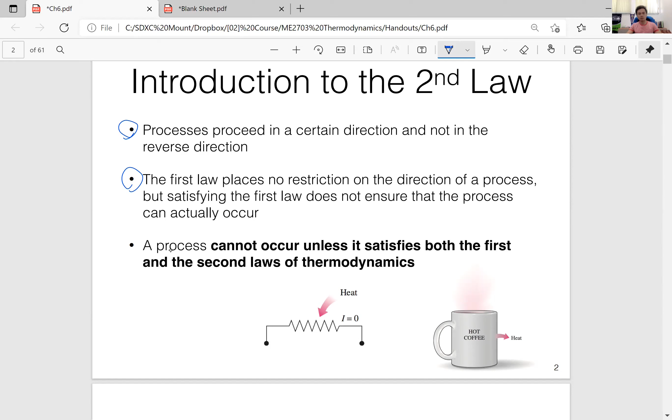Let's say this: processes proceed in a certain direction and not in the reverse direction. So the first law places no restriction on the direction of a process, but satisfying the first law does not guarantee that the process can actually occur.

You can see this in a very well-known, easy example: a hot coffee sitting on a desk. We know this coffee is getting colder and colder over time, because the thermal energy or heat is being lost from the hot coffee to the environment.

So this process happens in nature. However, we know this heat-losing process satisfies the conservation of energy.

If you have heat coming from the environment to the hot coffee, then this hot coffee will be getting hotter and hotter. But this doesn't happen. Why? Well, this heat addition process still satisfies the conservation of energy. We have Q in coming in, then the internal energy of the coffee increases, satisfying the first law.

But it doesn't happen, and it will never happen, because this heat addition process violates the second law of thermodynamics. So the second law of thermodynamics is like defining the direction of the process.

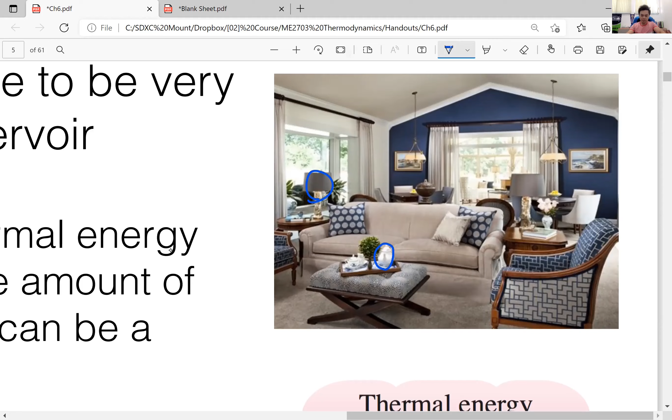Like this: a living room, the air, the atmosphere in this living room is the reservoir with respect to a teapot, a lamp, maybe something else. So the body does not actually have to be super big to be considered a reservoir, as long as it's relatively big, that's enough.

So any physical body whose thermal energy capacity is large relative to the amount of energy it supplies or absorbs can be a thermal reservoir. So a thermal reservoir doesn't need to be super big stuff like an ocean, river, or mountain - I believe a mountain could be a reservoir with respect to, I don't know, a camping fire, things like this. As long as it's relatively large, that's enough.

Then we have two types of reservoir: source and sink. Source is used to supply energy in the form of heat. Sink is used to absorb energy in the form of heat. Usually we call a source a high temperature reservoir, and a sink a low temperature reservoir. So source is to provide energy, sink is to absorb energy - one is high temperature, the other is low temperature.

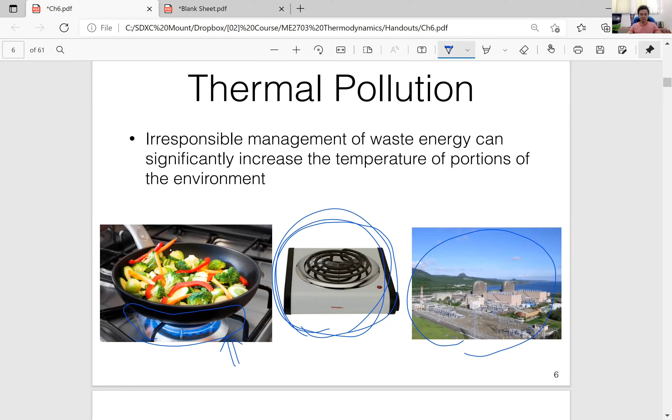This picture is a nuclear power plant in Taiwan, in Pingtung, in Kenting I believe. We know that the temperature around the outlet of this kind of nuclear power plant is a little bit higher. So a couple of years ago, there was an issue where the fish around the outlet of a nuclear power plant looked so weird - the baby fish didn't look like a normal fish, things like this. You can Google this news, I think it was maybe 10 or 20 years ago, not so long ago.

All right, heat engines. So we know that in thermodynamics, in mechanical engineering, the purpose of learning thermodynamics is we want to build a heat engine that has super good efficiency, that can do a lot of work. Heat engine, I would say, is the most important application of thermodynamics in our field, in mechanical engineering.

Okay, look at this. Heat engines are used to convert heat to work, so it's a work producing device. It's similar to a turbine, which is also used to produce work. However, a turbine is a single steady flow device, but a heat engine is not.

A heat engine consists of several steady flow devices, and a turbine is one of them. I think it's a minimum of 4 steady flow devices. The combination of these devices is used to produce so-called net work output, and we will see this later.

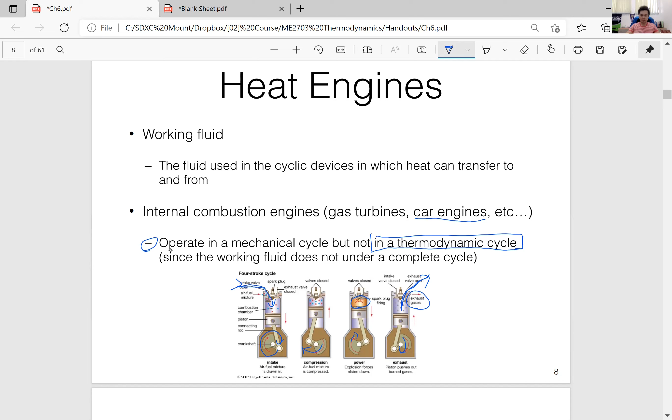External combustion engine is like a power plant. Usually, most power plants are external combustion engines. So the difference between internal combustion engine and external combustion engine is the place where the combustion happens. Internal combustion engine means combustion happens inside the engine. External combustion engines, literally, combustion happens outside of the engine, external to the engine.

So we will be focusing on external combustion engines in this chapter.

A very typical heat engine consists of at least 4 steady flow devices: pump, boiler, turbine, and condenser. Please keep this schematic in mind. You need to memorize the schematic of this very typical heat engine. Pump, boiler, turbine, condenser.

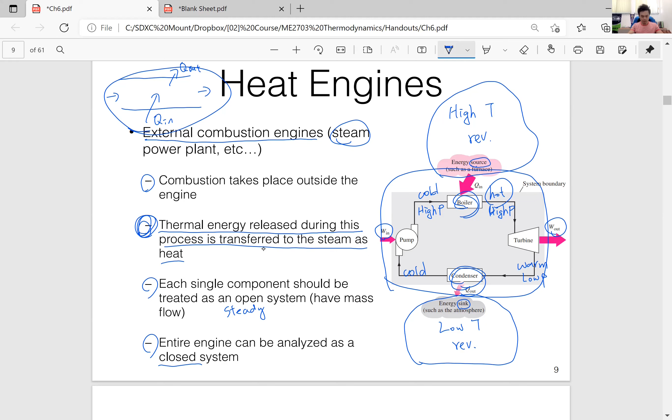So every single device in this heat engine is a steady flow device, and choosing the entire engine as one single system, then this heat engine is a closed system. Of course, you need to know the definition of closed system and open system so you can conclude like this.

So for a closed system undergoing a cycle, the change in internal energy is zero, right? Because from the energy balance equation, we know E in minus E out equals delta E system, which is U2 minus U1. If the process is a cycle, that means the final state is the same as the initial state.

So that means U2 equals U1. When U2 equals U1, we know this is zero. This is what the statement says here: for a closed system undergoing a cycle, the change in internal energy is zero.

So E in minus E out is zero. If we break down E in and E out, for a closed system, energy can be transferred by heat and work.

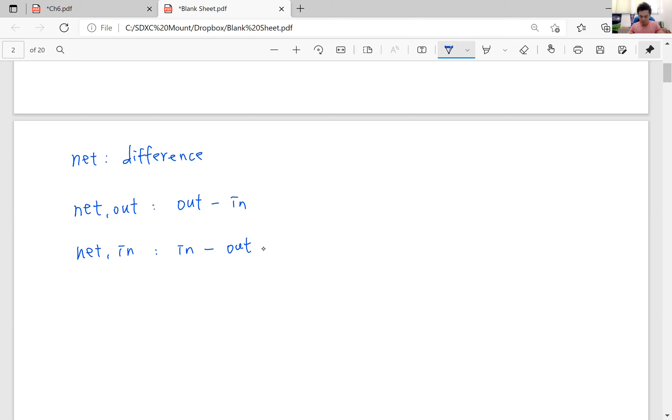Net means there's a difference. Net out means something out minus the same thing in. Net in is something in minus the same thing out.

So work net out is work out minus work in. Q net in is Q in minus Q out. The idea is the same, as long as you know: net out is out minus in, net in is in minus out.

Usually we don't say 'Q net in'—saying it isn't wrong, but we just don't do that. However, we do use 'net out' a lot, because this is what we care about most: how much work this heat engine can produce. So we have this name.

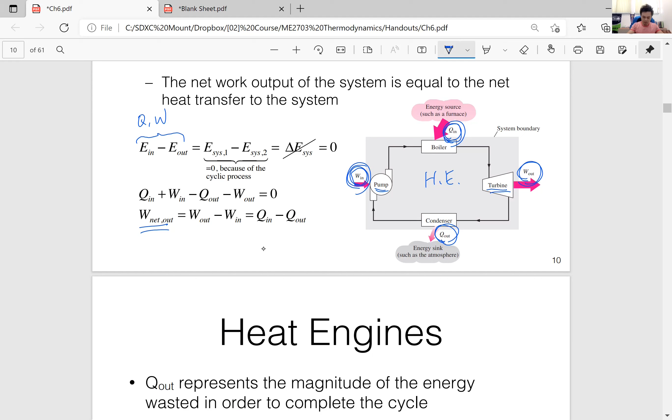Going back here, we want to maximize the net work output of this heat engine, since it's used to produce power—of course we want as much power as possible. One way to do it is to increase Q in: net work out is proportional to Q in. As long as we have a very large Q in, then we have a very large work out.

Another way is this: Q out is part of the process—the condenser dumps the waste energy to the environment, the energy sink. So can we minimize Q out, or make it zero? If we didn't have this condenser, we wouldn't need to dump waste energy, and net work output would be maximum, equal to Q in. That would be wonderful.

So Q out represents the magnitude of energy wasted in order to complete the cycle. However, unfortunately, Q out is never zero. We'll tell you why later.

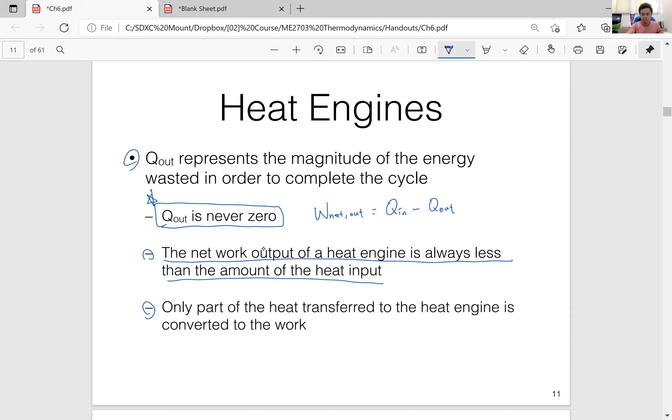Okay, so now we know Q out cannot be zero, but we can try to minimize Q out to save energy or to increase the thermal efficiency.

So the fraction of the heat input converted to net work output is a measure of a heat engine, which is the thermal efficiency. In chapter 1, we defined efficiency as desired output over required input. Keep this in mind because we will be using this for different types of devices.

Even though it's the same device, if the purpose is different, the purpose of a device is the desired output. For example, the refrigerator and heat pump are actually the same device. But because the purpose of a heat pump is to heat up a space, and the purpose of a refrigerator is to cool a space, these two devices sound like two different devices, but actually they are the same device with different purposes.

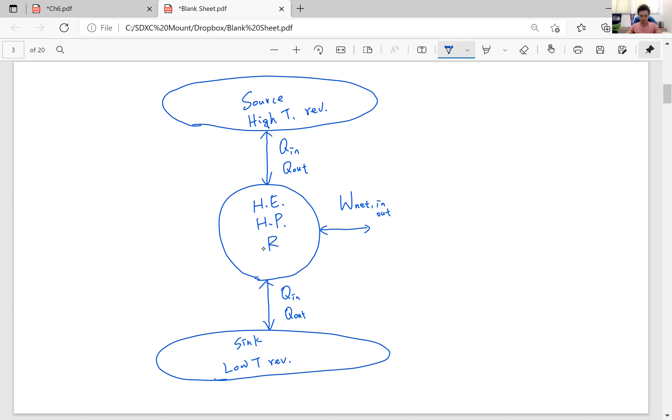All right, like for example, this is apparently a heat engine, because there's a work output. So this has to be a heat engine. The net work output of engine one is 20 kJ, the waste heat is 80 kJ, and the heat input is 100.

So by definition, the thermal efficiency is desired output over required input. The net work output is the desired output of a heat engine, so the desired output of this heat engine is 20. The required input, this 100 kJ, is the required input of this heat engine. So the thermal efficiency is 20%.

Well, if the net work output is 30 and the heat input is still the same, 100 kJ, then for heat engine two, thermal efficiency is 30%. So in this case, what I want to tell you is the waste heat here is not so important for the calculation - the desired output over required input, there's no waste heat term directly in this case.

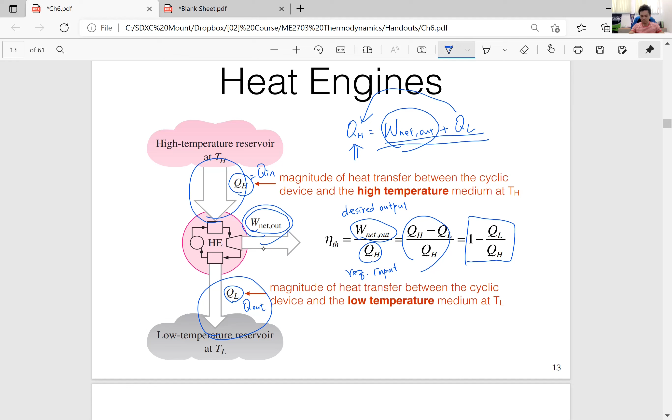So now the question is, can we save Q out? Yes, we can save Q out, but we cannot make Q out zero. Every heat engine must waste some energy by transferring it to a low temperature reservoir in order to complete a cycle. Another important concept is that we have to transfer it to a low temperature reservoir.

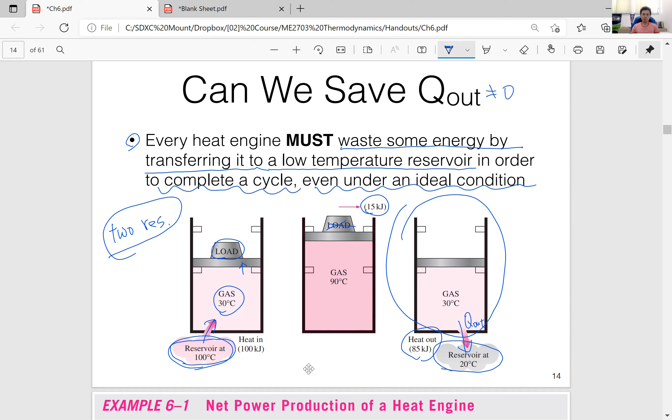One is high temperature reservoir, the other is low temperature reservoir. It has to have two heat transfer processes associated with two reservoirs. One is high temperature reservoir, which is the energy source. The other is low temperature reservoir, which is the energy sink. So two conclusions from this example: Q out is never zero, it's always positive, there must be some Q out. The other is this cyclic device has to have heat transfer processes with two reservoirs, a high temperature reservoir and a low temperature reservoir. That is the idea.

This example: heat is transferred to a heat engine from a furnace at a rate of 80 megawatts. If the rate of waste heat rejection to a nearby river is 50 megawatts, determine the net work output and thermal efficiency for this heat engine. From the first law, which is the conservation of energy, we know QH dot should be the summation of the net work output and heat rejection. This is Q in, one Q in, and we have two outs, one in, two outs, and they have to be the same.

So we can get net work out easily, which is 80 minus 50, so we have 30 megawatts net work output. Then thermal efficiency is desired output over required input. Desired output is just the net work out. Required input, we have only one input. That is the thermal efficiency. Simple, straightforward.

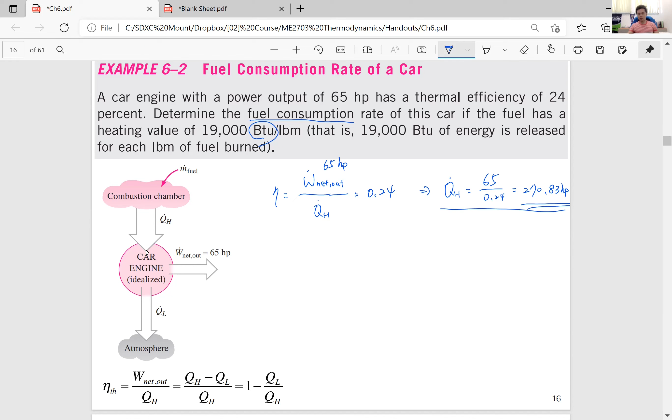So this QH is the fuel consumption. I think all you need to do is convert horsepower into BTU, then divide by this 19,000 BTU per LBM. So you can know how much LBM the fuel has to be consumed.

Next one is Kelvin-Planck's statement. The entire second law of thermodynamics can be constituted by two statements. One is Kelvin-Planck statement, the other is Clausius statement. So these two statements are the foundation of the second law of thermodynamics, so very, very important, and you need to really understand what these two statements are.

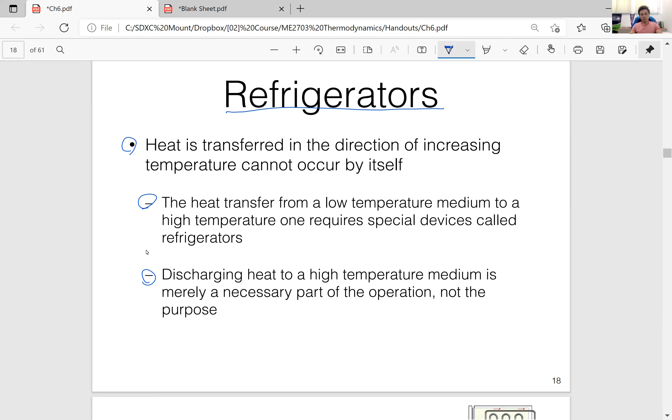We know, for example, a heat engine - we have talked about heat engines before. This is TL, we have Q in, we have Q out. This is a heat engine. Now we are looking at the refrigerator. A refrigerator consumes work, so there's a work input, which is electrical work in.

We are transferring the energy from a low temperature medium to a high temperature one. So we want to transfer this energy from low temperature medium to high temperature one. This is QH, this is QL. This is the schematic of a refrigerator. Let me share this.

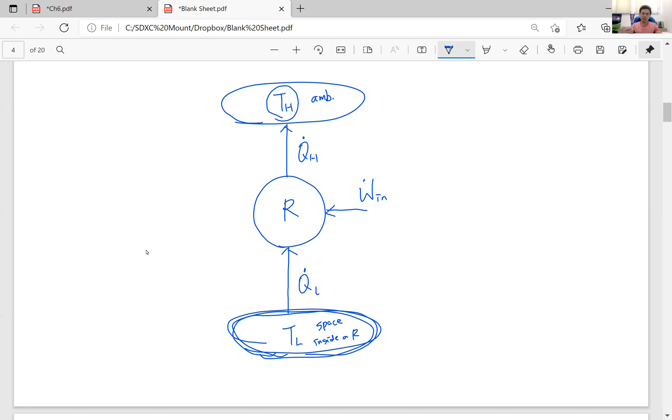This is because a refrigerator actually dumps some energy, or transfers some energy, from inside out. This is inside, this is outside the refrigerator. So this is how a refrigerator looks like, the schematic, and we know it requires work input.

But here, actually, this is what I want to talk about. Discharging heat to a high temperature medium is merely a necessary part of the operation, not the purpose. So this is not the purpose - this is the purpose. For a refrigerator, we want to cool the space inside the refrigerator. This is the purpose. But QH dot here is not the purpose.

But from Kelvin Planck's statement, we know this cyclic device has to interact with two reservoirs, and the heat rejection cannot be saved to zero - it must reject some heat. In this case, QH dot is the heat rejection. Because now we are talking about a refrigerator, what is being rejected? QH dot - this is the heat rejection. So it has to interact with two reservoirs, and it has to have some heat rejection. These two conditions are satisfied.

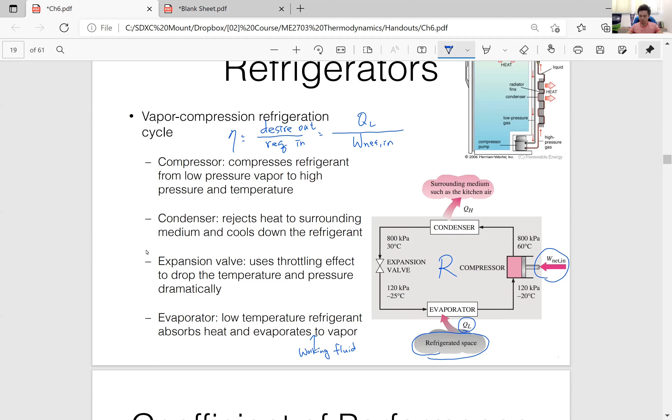But from the energy balance, we know that the summation of these two ins, QL and net work in, should be the same as QH. So QL plus net work in equals QH, which means net work in is QH minus QL.

So now the question is, we can divide QL on both sides. This gives QH over QL minus 1. And we know QH is larger than QL.

So QH over QL is greater than 1, meaning there's a chance this value is larger than 1. If QH over QL is 1.1, then this becomes 0.1, times 100, that's 10, or 1000%. It's larger than 1.

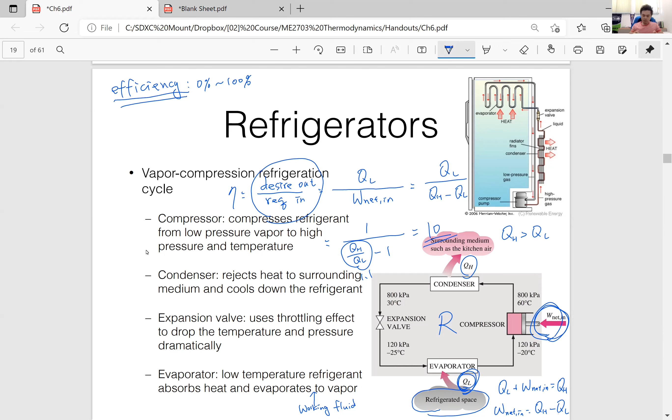Using this traditional definition — when we say efficiency, efficiency is defined between 0 to 100%. This is how we usually use the word efficiency, from 0 to 1, or 0% to 100%. But if we follow this, we end up with more than 100% efficiency. So in this case, we don't call this efficiency.

We call this coefficient of performance, aka COP. You will hear this if you want to buy a refrigerator — the value you need to evaluate the efficiency is not thermal efficiency anymore, it's usually denoted by COP, coefficient of performance.

So this is what I just wrote — we don't call this efficiency anymore. We don't use this term because efficiency implies the maximum is 1 or 100%. So instead, we use COP. The value of COP can be greater than 1, it depends.

And R here represents refrigerator, because later we will talk about the heat pump, so COP HP, where HP means heat pump. These two devices are the same — heat pump and refrigerator are the same device, but the purpose is different. We will talk about heat pump later.

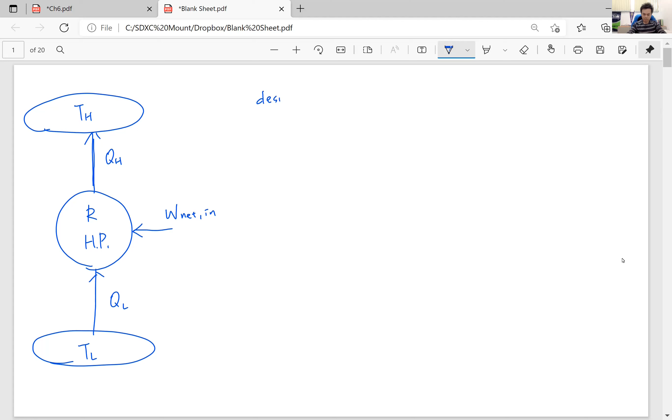The performance or efficiency we use, the definition is the same: it's desired output over required input. For refrigerator, the desired output is what? Because a refrigerator, we want to cool a space as much as possible, so apparently we want to maximize QL so that TL, this space, can be very, very cool.

So for refrigerator, the desired output is QL. But for heat pump, the desired output is supposed to be QH, because for heat pump we want to maximize the temperature in this space. So we want to maximize QH. Their desired output is different, although they are exactly the same stuff, because the purpose is different.

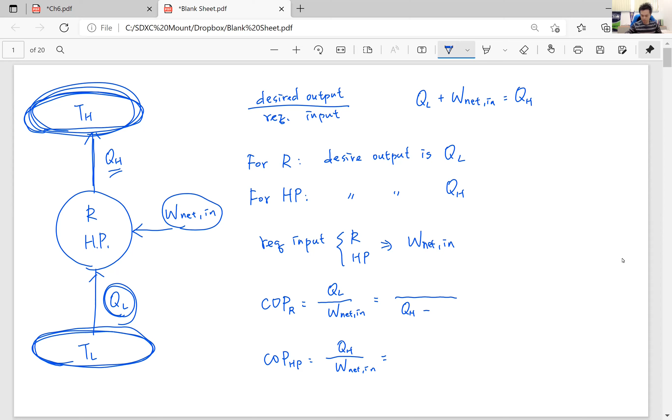From energy conservation, we know QL plus network input should be the same as QH. From the energy balance, QL plus network input should equal QH. So we can rewrite COP as QH minus QL. Network input is QH minus QL. Then up here for refrigerator, this is QL. And for heat pump, up here this is QH, over QH minus QL.

So we can further divide by QL on both sides. This becomes 1, this is QH over QL minus 1. And dividing by QH, this is 1, this is 1 minus QL over QH.

So you can see heat pump is actually COPR plus 1. COPR is QL over QH minus QL. If this plus 1, that becomes QH minus QL over QH minus QL, which is QL plus QH minus QL over QH minus QL, that becomes QH over QH minus QL, which is COPHP.

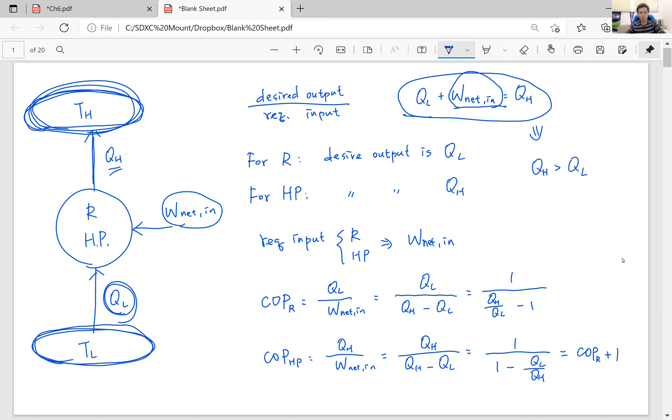Another thing to notice is from the energy balance equation, we know QH is larger than QL. It's always larger than QL because the network input is always a positive value. So QH is always greater than QL. Look at this - so this ratio is always greater than 1.

Because QH is always larger than QL, COP-HP is always greater than 1, of course. Yeah, because COPR is greater than 1, so COP-HP has to be even larger than 1 by 1. Okay, all right, so go back to the slides.

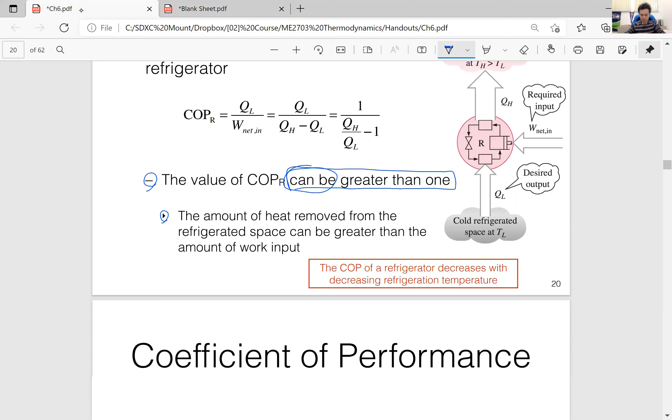And for heat pump, COP-HP is always greater than 1. It's always greater than 1 because COPR is a positive quantity. Well, COPR is not necessarily always greater than 1, it can be greater than 1.

If QH is 10 times QL, then COPR is less than 1, right? But if QH is very close to QL, COPR can be greater than 1. So it can be greater than 1, can be smaller than 1, it doesn't matter. But COP-HP is always greater than 1 because COPR is a positive value, can be 0 point something or can be something greater than 1. So no matter what, plus 1, that means COP-HP is always greater than 1.

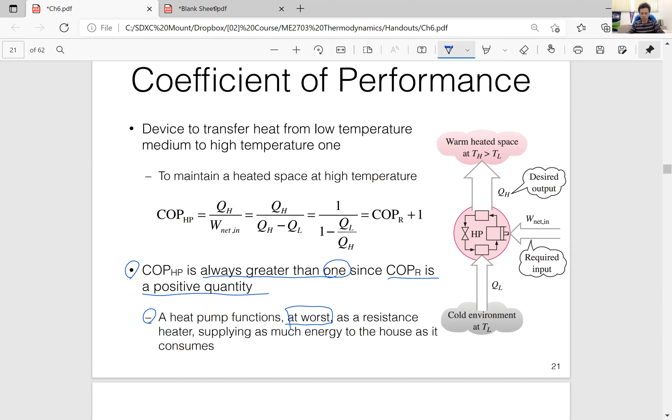So that brings an interesting point: a heat pump functions at worst as a resistance heater, supplying as much energy to the house as it consumes. So you can see that a heat pump consumes power, but a heat pump uses this work input to draw some energy, then combine these two energies together to supply to the heating space, which is this space.

COP heat pump is greater than 1. That means in terms of energy usage efficiency, if you want to heat up a space using a heat pump, it's better compared with the resistance heater, because we know for a resistance heater, the energy transformation rate is 100%. All the electrical power can be transformed into thermal energy, 100%, for a resistance heater.

But heat pump can do much more. Heat pump can use this energy to draw more energy and together supply to this heating space. So in terms of energy efficiency, in terms of the performance, using a heat pump to heat up a space is better. But would you do this? That's a question, because usually the cost of a heat pump is much higher than the cost of a resistance heater.

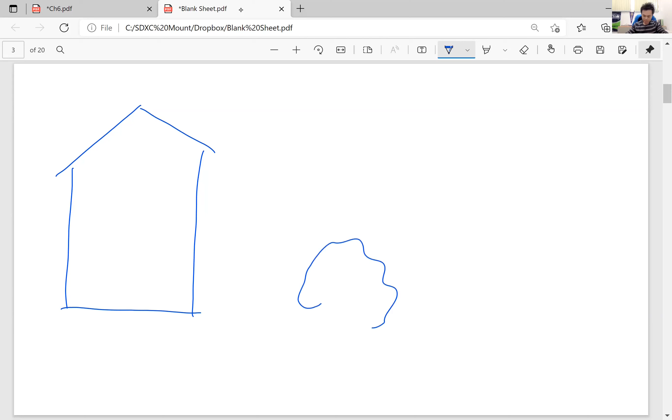And I can't remember, that's a very good example or homework. It's like a design problem, and I like that, but I couldn't find it in the textbook anymore, I'm not sure why. If there's a house, and there's a hot rock, let's say this, there's a hot rock, like 100 degrees or 500 degrees hot.

So now the question is, how do you want to use this hot rock to heat up this house with maximum temperature increase? If cost doesn't matter, you don't need to concern about cost issues. Well, of course, you can just bring the rock to the house, right?

Then this rock will release some thermal energy, right? So eventually the temperature of the rock and the temperature of the room will reach thermal equilibrium, right? That works. But is this the best usage of this hot rock? Apparently no, right? Because now you have learned the heat pump.

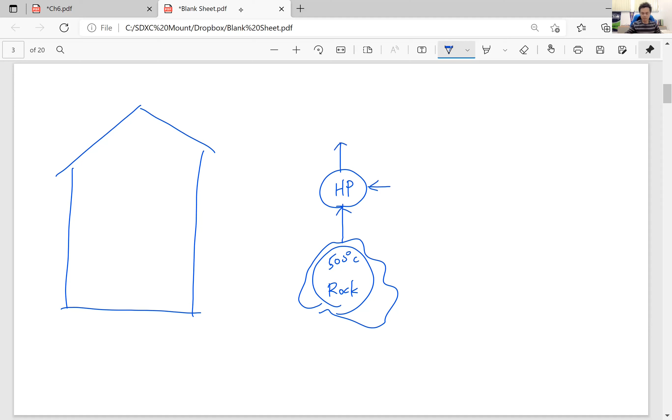Hot rock means this is an energy source. So if you could use this energy by heat pump, the heat pump can bring additional energy, which is the electrical power consumption. So this heat pump can draw all the energy inside this hot rock together with the energy consumed, to supply to this house. Using this way, we can better use the energy stored in this hot rock, by a heat pump.

So this is more energy efficient, but one more time, this is the case when cost is not an issue. But cost is always an issue in reality, right? A heat pump costs like a few thousand New Taiwan dollars. So that's a sociology problem, I'm gonna say this, okay? There's a problem with this, okay?

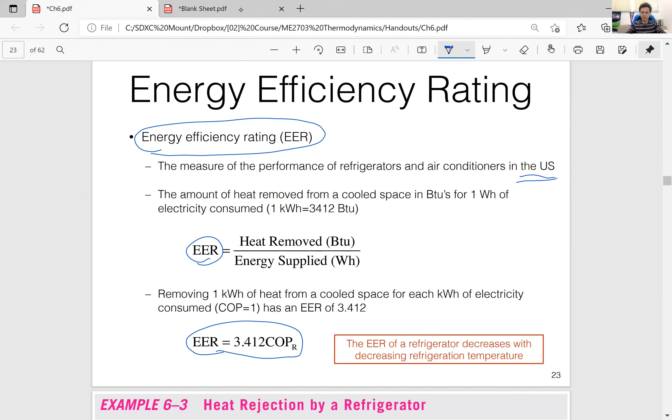Okay, another index to evaluate the performance of a heat pump or refrigerator is EER, energy efficiency rating. We don't use this a lot because it's just a unit conversion, and it's very common in the US. So EER and COP, their relationship is just a linear equation, a linear relationship. Not so important, but I just wanted to let you know there's another measure to evaluate energy efficiency, EER.

Look at this example. The examples in chapter 6 are super easy, but you need to know the concept. The concept in chapter 6 is super important. Okay, look at this. The food compartment of a refrigerator is maintained at 4 degrees by removing heat from it at a rate of this much. If the required power input of the refrigerator is 2 kilowatts, determine the COP and QH dot.

That's super easy, right? Because this is COP. This is a refrigerator, so COP of refrigerator is desired output over required input. So desired output of a refrigerator should be QL dot, right? Required input is the net work input. That's all, right?

So this is 360 kJ per minute, so over 60 to become kJ per second, which is kilowatts, right? Over net work input is 2, that's it. Then based on energy balance, QH dot should be the summation of QL dot plus the net work input, which is 2 plus 6, right? This is 8. So this is 6 over 2, which is 3. Okay, that's all. Easy.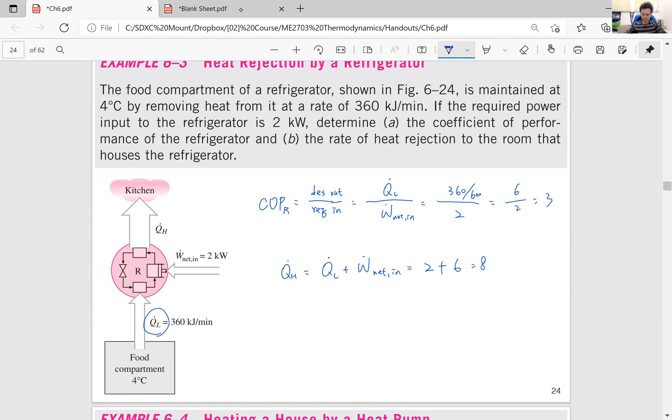Another one is a heat pump. A heat pump is used to meet the heating requirement of a house and maintain it at 20 degrees. On a day, the outdoor temperature drops to -2 degrees, and the house is estimated to lose heat at a rate of 80,000 kilojoules per hour.

If the COP of the heat pump is 2.5, we are looking for the power consumption of the heat pump and QL dot. The house is kept at 20 degrees, so the amount of heat loss should be the same as the amount of heat gain by the house. So you need to realize that this QH dot is actually 80,000 kilojoule per hour, so that the house temperature can be maintained.

The COP of the heat pump is given. COP heat pump equals desired output over required input. Desired output of a heat pump is QH, and required input is the net work input. COP is 2.5, and we know QH dot is 80,000 kilojoule per hour, so we can get the net work input.

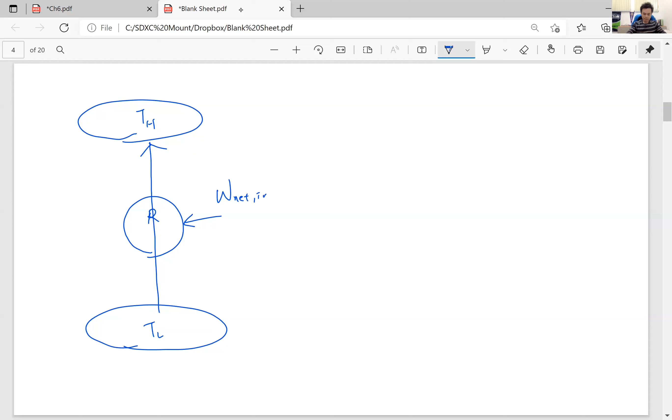One more time: the Clausius statement states that transferring energy from a low temperature medium to a high temperature medium is possible by using a refrigerator that has to consume some power, and that power is work. In other words, a refrigerator needs these three elements: QL, QH, and net work input. You need all three of these. Without any of these three energy transfers, this refrigerator cannot work. That is what the Clausius statement states.

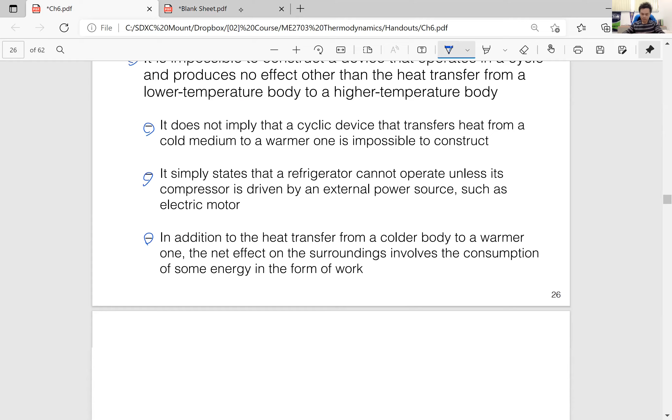The second law, just like the first law, is based on experimental observations. The Kelvin-Planck statement and the Clausius statement are negative statements, meaning they cannot be proved mathematically, because they are experimental observations. Again, the Kelvin-Planck statement and the Clausius statement can be used as expressions of the second law of thermodynamics. These two statements are the fundamentals of the second law.

Recall that in the very beginning of this chapter, we said the first law places no restriction on the direction of a process. Hot coffee gets colder and colder, it will not get hotter and hotter. Even though the energy transfer to this hot coffee satisfies the first law of thermodynamics, which is conservation of energy, this heat addition process to the hot coffee violates the second law because the direction of this heat transfer violates the second law of thermodynamics.

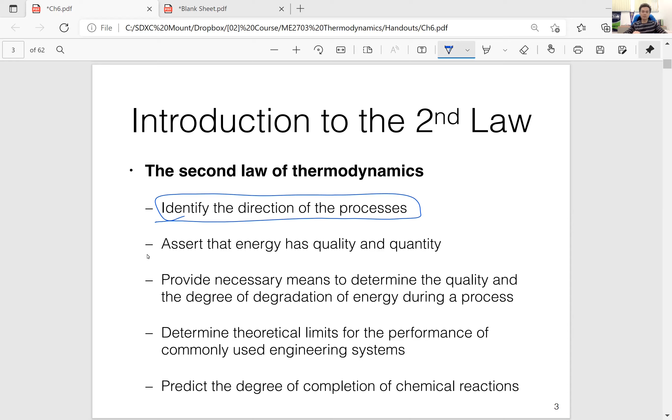Let's go back to the Clausius statement. We finished the second law. Now we are going to prove one thing: any device that violates the Kelvin-Planck statement also violates the Clausius statement, and vice versa.

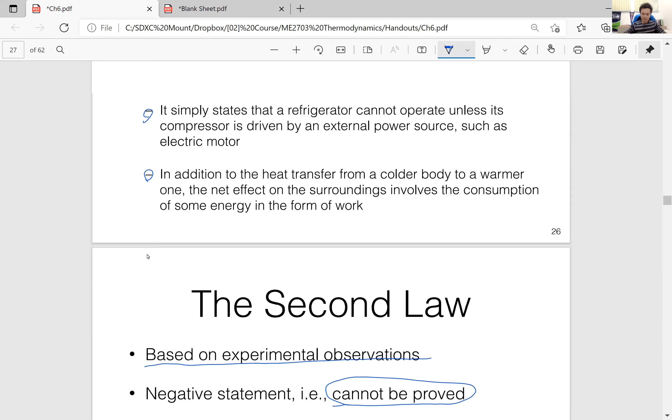So it looks like the Kelvin-Planck statement talks about the number of reservoirs, right? We need two reservoirs, and the thermal efficiency of a heat engine cannot reach 100%. The Clausius statement tells us that transferring energy from a cold medium to a high temperature medium is possible by a refrigerator, but that refrigerator has to consume power. It looks like these two statements are not related to each other, but actually they are.

Now we are trying to prove that violating the Kelvin-Planck statement also violates the Clausius statement, and actually, violating the Clausius statement also violates the Kelvin-Planck statement. Let's try to prove this.

So now we have a heat engine, and we assume this heat engine has a thermal efficiency of 100%. That violates the Kelvin-Planck statement, right? Because the thermal efficiency is 100%, this heat engine can operate with only one thermal reservoir. So this heat engine doesn't require the low temperature reservoir, because the efficiency is 100%. So all the heat supplied by the high temperature medium is 100% converted to the net work output.

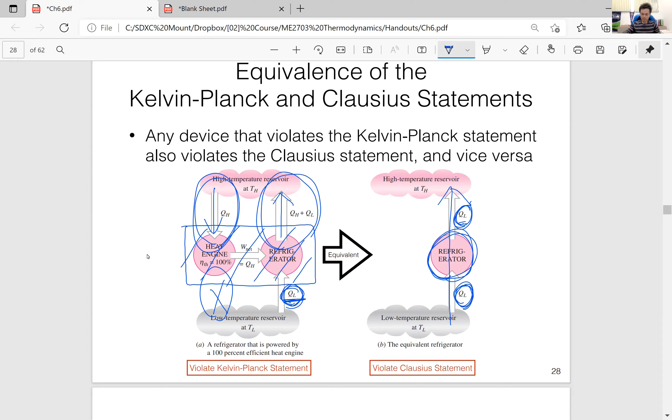Next is perpetual motion machine. So what is this? What is machine? This is a PMM.

A process cannot occur unless it satisfies both the first law and the second law of thermodynamics. We already know this. Any device that violates either law is called a perpetual motion machine. But so far, no perpetual motion machine is known to have worked.

I will emphasize this: so far, at this moment. That doesn't mean you won't be able to find anything that violates either law. You probably could.

If one day in the future you figure out there's a machine that violates either law, I guarantee you could win the Nobel Prize. But when you deliver a lecture for the Nobel Prize, you could just mention a little bit about me. You could say that when I was an undergraduate student, taking Dr. Wen's thermodynamics, he mentioned that no perpetual motion machine had been found by the time he gave us this lecture, but he encouraged us to find one, and I did. So I won the Nobel Prize. Thanks, Dr. Wen, for his lecture like 20 years ago. Maybe by that time I'm already dead, but it's fine. I will feel happy for you, and for myself as well. I wanted to say it's a joke, but this could be true, right? Who knows? I don't know. Okay, but at least so far, no perpetual motion machine has been found.

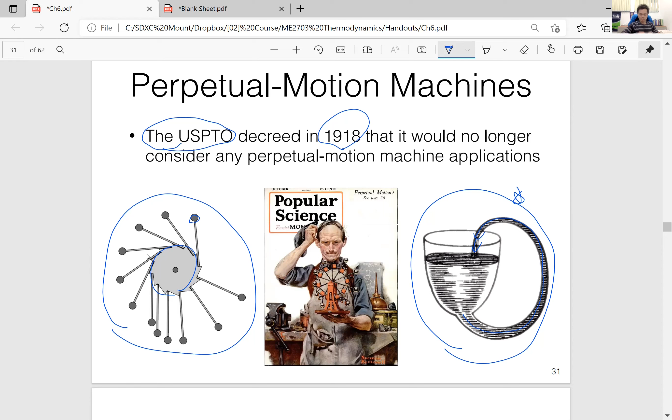Frauds of PMM. Well, this is Chinese, but this is the most interesting one. I copied this from the internet, I think from Wikipedia. This is the yellow one here, this is interesting. This guy published or described something in this journal: I think the cleverest perpetual motion machine ever invented was one displayed in the Paris Expo in the 1860s.

It's super interesting, you can see this. It consisted of a large wheel with balls rolling about in its compartments. The inventor claimed that nobody would ever be able to stop the wheel because it was a perpetual motion machine. Many visitors tried to stop it, but it went on turning as soon as they took their hands off it. So they pushed it to try to stop the rotation.

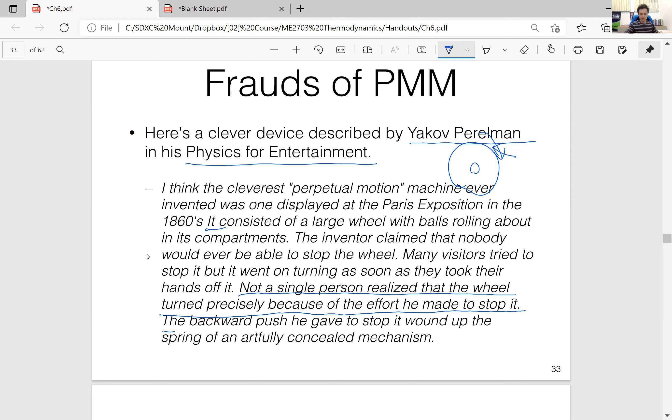If this wheel is rotating clockwise, people wanting to stop it would push counterclockwise. But turns out not a single person realized that the wheel turned on precisely because of the effort he made to stop it. Because of what? The backward push he gave to stop it wound the spring of the artfully concealed mechanism. So pushing back on this wheel actually gives the energy to make this wheel turn.

So this is very interesting. Of course, this is a fraud. I think this guy never learned thermodynamics, but this guy might be an expert in psychology.

Let's continue on our lecture: reversible processes. The following ideas are very important for the rest of chapter 6: reversible process, irreversible process, and Carnot cycle, which is the most important stop in chapter 6, I believe. So let's look at this.

Reversible process, what is this? A reversible process is one that can be reversed without leaving any trace on the surroundings. That sounds very ambiguous, but if you can see an example like this, let me show you.

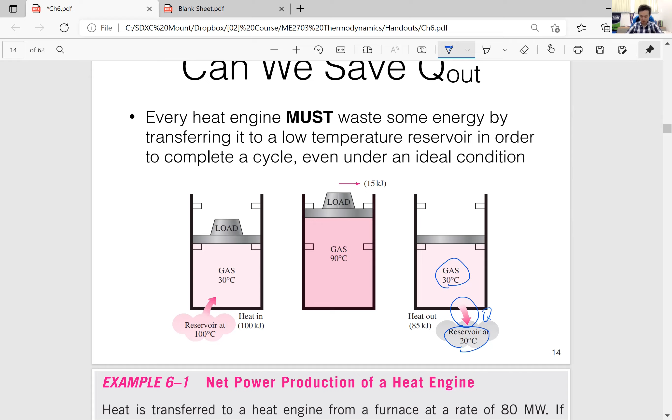That means any trace on the surroundings. In this case, I would say this is the heat out, Q out. So this Q out, because the gas temperature and the reservoir's temperature are different, this heat transfer process could cause some kind of trace. Another, more explicit example is a cooking grill.

So if this is a reversible cooking, let's say Q is 600 kJ to this broccoli and everything else. If this is a reversible process, then when we cool this cooking stuff, the heat release should be 600 kJ, without leaving any trace.

But actually, when we cook this, there's a heat loss, heat waste to the surroundings. So this is a kind of so-called trace.

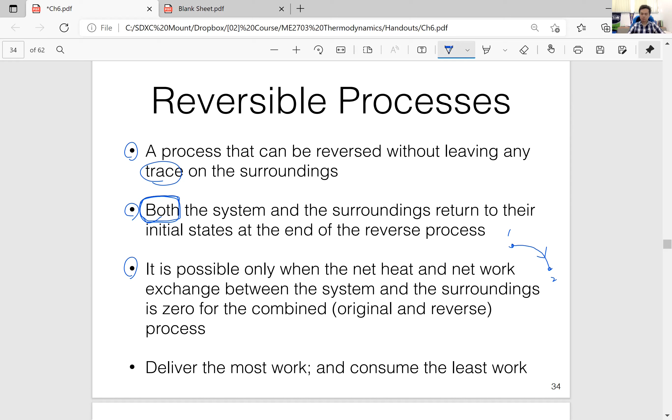Well, not necessarily a real cycle, but the original process and reverse process -- if this is state 1, this is state 2, and the path is this curve from state 1 to state 2. If this process is reversible, that means when you want to go from state 2 back to state 1, you follow exactly the same path, then go back to state 1. So it's not a real cycle, right?

A cycle is like this. This is a cycle. This is 1, this is 2. They are at the same point. So this is different.

And this is probably the most important conclusion. I made this -- how many stars? 10 stars. So that means this is so important.

If the process is reversible, that means if your device is experiencing a reversible process, then if your device is used to deliver work, this device delivers the most work. Similarly, if your device is used to consume work, then if your device is a reversible device, it consumes the least work. This is a very important conclusion when we learn the so-called reversible process.

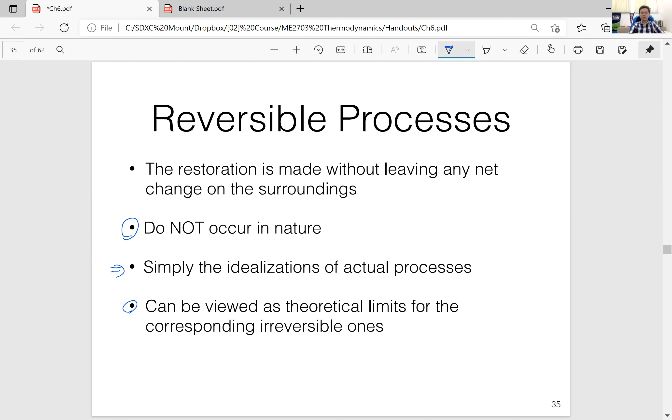So that's the purpose. We want to know the maximum, the critical, theoretical limits -- we want to know if the device we design runs in reversible processes, how much work it can deliver. Then this work is the most work this device can deliver.

Or the work consumed is the least work consumed by this device. That's the purpose. We want to know the capability, the maximum or minimum capability of the device we design, if we use the reversible process, if the device runs in reversible processes.

So if the processes are not reversible, then they are irreversible processes. Processes that are not reversible are irreversible, that cannot reverse themselves spontaneously and restore the system to its initial state. It's not reversible. The surroundings usually do some work on the system and therefore it does not return to its original state.

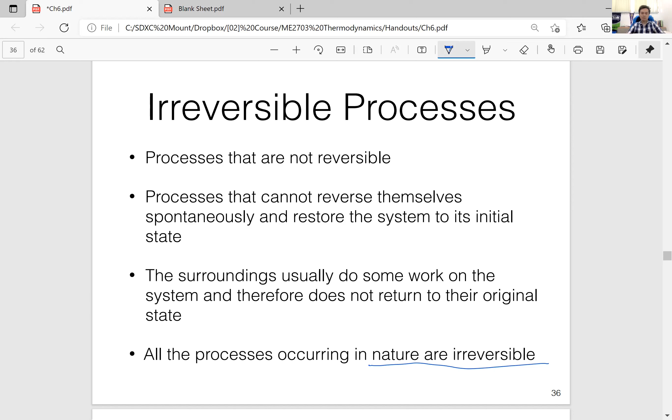This is reality. So all the processes occurring in nature are irreversible. Again, reversible processes do not exist. So what causes a process to be irreversible?

There are a lot of irreversibilities that occur in nature. For example, heat transfer process across a finite temperature difference. I think this is a very important one. Temperature difference is a driving force for heat transfer, so all heat transfer happening in reality is irreversible. That makes sense, because we know all processes in nature are irreversible, and all heat transfer happens across a finite temperature difference, which is the driving force for heat transfer in nature. So heat transfer across a finite temperature difference is an irreversibility. This one is important.

Another one is friction, unrestrained expansion, mixing, electric resistance, inelastic deformation of solids, or some other chemical reactions. So all these are irreversibilities, and there are a lot more.

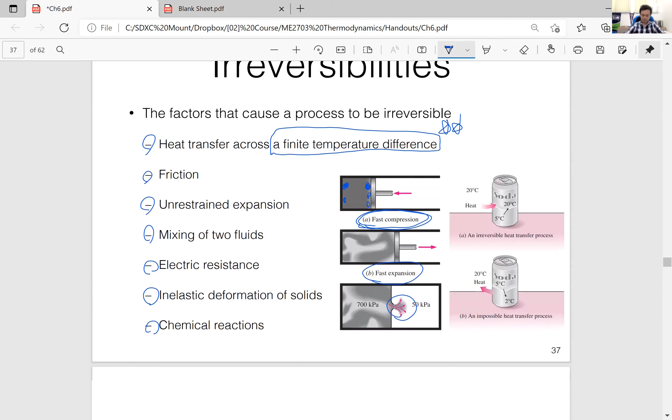But if we compress slowly, nicely, we can just assume the properties at these two different locations are the same. So fast compression, fast expansion, or unrestrained expansion, they are irreversibilities. So the purpose of learning reversible process is we just want to know the capability, the limits of the device we design.

Reversible processes can be grouped into three: one is internally reversible, then we have externally reversible, and another one is totally reversible. So this categorization, internal, external, or total, refers to the location of the irreversibility.

Location of irreversibility. So internally reversible means no irreversibility occurs within the system. If the process is externally reversible, that means there's no irreversibility occurring outside of the boundary of the system, or just outside of the system. Totally reversible means that both inside and outside the system, there are no irreversibilities. So it's about the location of the irreversibility.

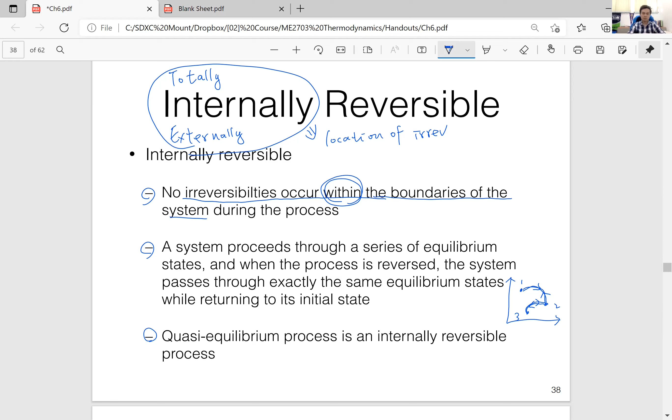So quasi-equilibrium process is an internally reversible process because when we talk about quasi-equilibrium, the focus is what happens inside the system. We don't care what happens outside of the system. This is internally reversible.

Externally reversible means there's no irreversibility outside of the system. The heat transfer between a reservoir and a system is an externally reversible process if the outer surface of the system is at the same temperature as the reservoir. So if we have a system, a piston-cylinder device, if this piston is attached to a reservoir.

This is your system. If there's a heat transfer, let's say from reservoir to the system, we know the driving force of the heat transfer is temperature difference in nature. But if the system's temperature and the reservoir's temperature are the same, and under this circumstance there's still a heat transfer from reservoir to system or from system to reservoir, then this heat transfer is reversible because the temperature is the same. But this doesn't exist in nature, because we know the driving force of heat transfer is temperature difference. So if their temperature is the same, how come there's a heat transfer?

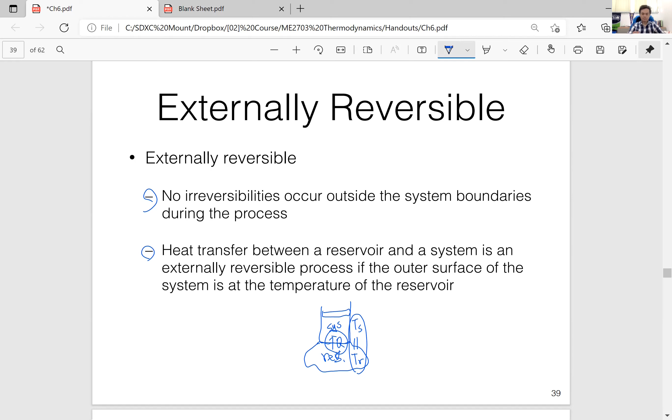If this heat transfer exists, then this should be a reversible process. So this heat transfer, whether from reservoir to system or system to reservoir, has to be reversible. Recall that when we mentioned irreversibility, heat transfer across a finite temperature difference is one of the irreversibilities. So if the temperature of the system is the same as the temperature of the reservoir, then the heat transfer in between should be a reversible process because it doesn't exist.

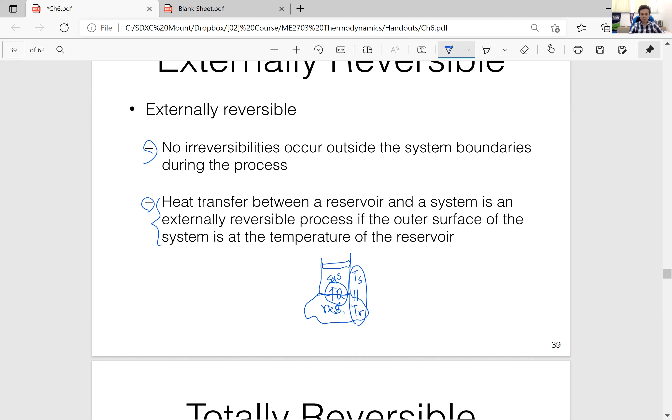Totally reversible, so there's no irreversibility within the system or its surroundings. So it's about the location of the irreversibility. No heat transfer through a finite temperature difference, no non-quasi equilibrium changes, no friction or other dissipative effects. So all the system and its surroundings are reversible. It's a totally reversible process.

So this is totally reversible because this reservoir is at the same temperature as the system. So this heat transfer process, Q, is reversible. It's totally reversible if there's no irreversibility inside the system. This heat transfer is outside of the system, so there's no irreversibility inside the system, and this heat transfer process Q is across the same temperature as the system. So this heat transfer process is also reversible. So this system is internally reversible and externally reversible. So this process is totally reversible.

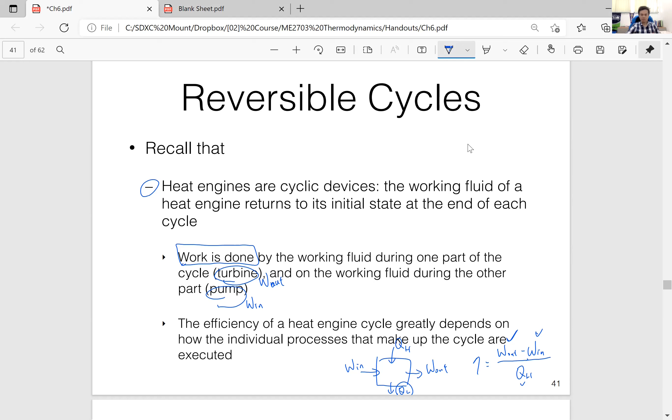So we know if this is a pump, there's a turbine, a boiler, a condenser. So we have QH, we have QL, we have work out, we have work in. And we know the efficiency is desired output, which is work out minus work in, over required input, which is QH. So these can be rewritten using QL in whatever component. So the efficiency of a heat engine depends on all these energy transfers, whether it's work or heat.

So the net work, thus the cycle efficiency, can be maximized using processes that require the least amount of work and deliver the most by using reversible processes. So that means the most efficient cycles are reversible cycles. So if we want to maximize the efficiency, how can we do this? We can maximize work out, or minimize work in, or minimize QH, right?

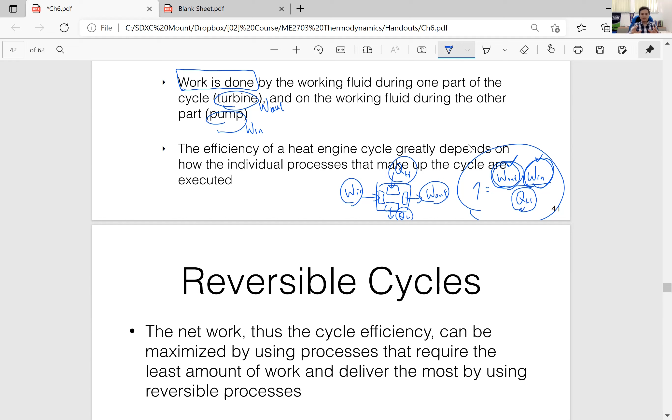This is what we want. But we know these 4 components depend on their individual process, right? Because this is a steady flow device, boiler, this is a steady flow device, condenser, steady flow device, a pump, another steady flow device, which is a turbine. So turbine has its own process, condenser has its own process, pump has its own process, and boiler has its own process. So as long as we can optimize the process of every single independent individual device, then together to be a heat engine, this heat engine can work in optimum state, which is a reversible cycle.

All right. So reversible cycles cannot be achieved in practice. Because what? Because reversible processes are required to make a heat engine or to make a cycle reversible, but we know that reversible processes do not exist in nature.

But even though, we still want to use reversible cycles to make some kind of calculations to know their upper limits or lower limits on performance of real cycles. That's the purpose, because we want to know the capability of the device we want to design.

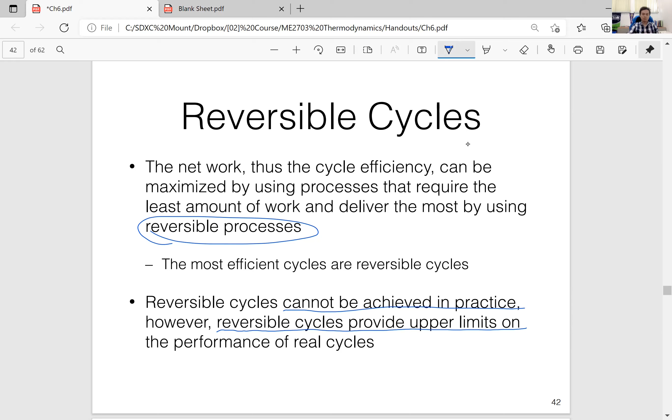So we could assume, for example, if a heat engine - if I am a designer, I am designing a heat engine, then I assume this heat engine is reversible, and I got the efficiency, for example, like 70%. So 70% is a theoretical limit. And I assume the processes occur inside this heat engine are reversible. Then I got 70% efficiency, and this efficiency is the maximum, the optimum. So in reality, the heat engine's efficiency should be lower than 70%, because 70% is maximum. And I assume this heat engine runs in reversible processes, but I know that reversible processes do not exist in reality, in nature. So that we can still estimate maximum performance, maximum work output, things like this.

So what is this engine? It's actually Carnot engine, or Carnot engine runs in Carnot cycle. So Carnot cycle - like I said, I believe this is the most important stuff in chapter 6.

Carnot cycle. It's proposed in 1824, almost 200 years ago, by a French engineer, Sadi Carnot, and a Carnot cycle includes 4 reversible processes. Remember, 4 reversible processes. So Carnot cycle does not exist in reality. As long as the device involves a reversible process, then this device is imaginary. It doesn't exist. In reality, it just serves as an idealization or optimum model for the design.

So 4 reversible processes: 2 isothermal and 2 adiabatic. 2 isothermal reversible processes and 2 adiabatic reversible processes. So all these 4 processes are reversible. A Carnot cycle can be executed in a closed or a steady flow system. It's the most efficient cycle operating between 2 specified temperature limits. We will talk about this later, and it's very important.

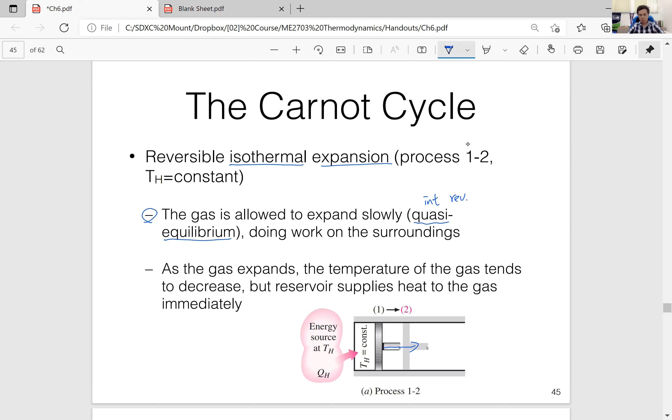This is internally reversible. So expansion is the work done on the surroundings, because the piston is pushing the surroundings, doing work onto the surroundings. So the gas is allowed to expand slowly, doing some work onto the surroundings. So the temperature inside the system is supposed to be decreasing, right?

However, we attach an energy source, which is a high temperature reservoir, onto this system. That ensures that the temperature inside the system remains constant at the same temperature as this high temperature reservoir. So this heat transfer process, QH, is at the same temperature. So this heat transfer process is reversible because the temperature of the high temperature reservoir is the same as the temperature inside the system. So this is zero temperature difference heat transfer, so this heat transfer process is reversible.

Remember, finite temperature difference heat transfer is irreversible, but this is zero temperature difference heat transfer, which is reversible. So as a gas expands, the temperature of the gas tends to decrease, but because there's a reservoir attached to the system, the reservoir supplies heat to the gas immediately. And don't forget the definition of the reservoir or energy source: it's a high temperature reservoir, so the unique characteristic is that the temperature doesn't change.

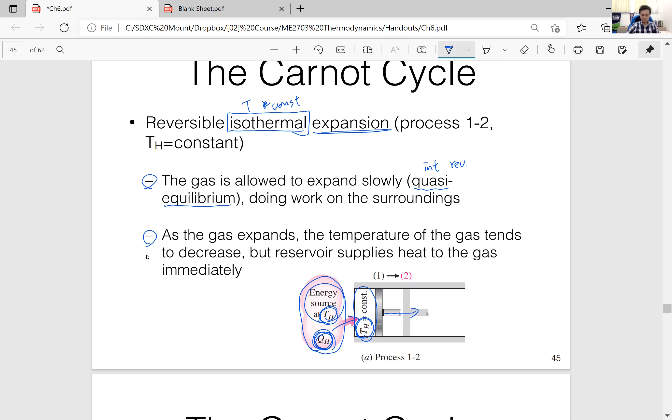Process 2 to 3. So when the expansion reaches this position, I remove the reservoir and make this side insulated, adiabatic, which is process 2 to 3. Then the temperature decreases from TH to TL. This is nature - when the system is doing work onto the surroundings, temperature tends to decrease.

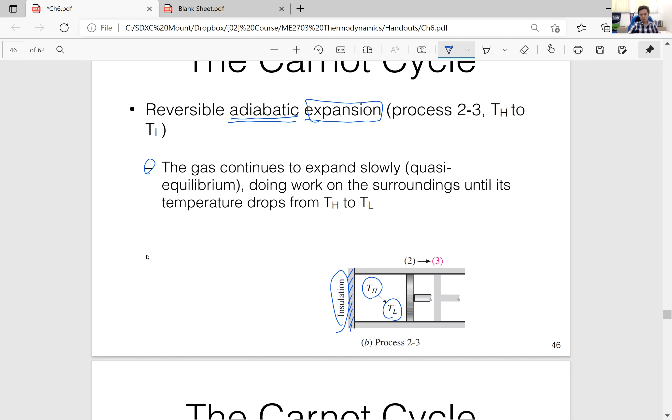Temperature decreases because the system is losing energy, doing work onto the surroundings, like pushing air - you lose some energy. The system loses energy, so temperature drops from TH to TL. This is still an expansion process, and because all sides are adiabatic, this is adiabatic expansion. The gas continues to expand slowly, still in quasi-equilibrium, doing work onto the surroundings until its temperature drops from TH to TL.

Then from state 3 to state 4 is reversible isothermal compression. Now we are compressing the system - this is isothermal compression. So when we compress a system, the system's energy increases, so the temperature is supposed to increase. But in this case, because we attach an energy sink to this system...

The additional energy from this compression process is transferred to this energy sink. In that way, the temperature of the system remains constant at TL, and this energy sink's temperature is also TL. So this QL heat transfer process is reversible because it occurs at zero temperature difference - the energy sink's temperature and the system's temperature are the same. So QL is a reversible heat transfer process.

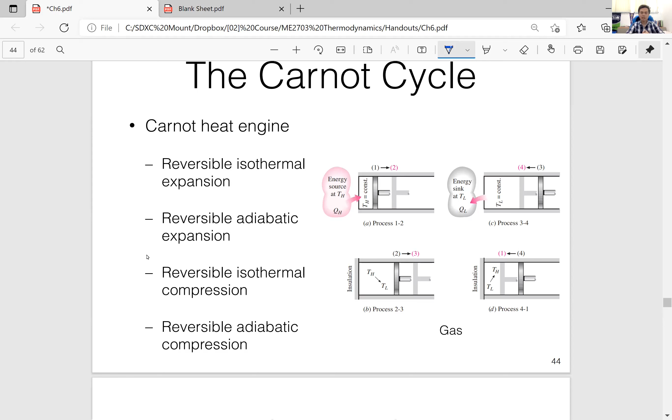For reversible processes, you need to keep this in mind, every detail. Reversible - we have two isothermal processes and two adiabatic processes, overall two expansions and two compressions. So it's very important. And the Carnot cycle is, I think, the most ideal cycle we learn.

Process 1 to 2, there's a QH coming in. This is an isothermal process, and it's an isothermal expansion, right? Because V1 is less than V2, so V2 is larger than V1, so we know it's an expansion process. So it's an isothermal expansion process.

There's a heat coming in. This heat transfer process is QH. 2 to 3 is also an expansion process, but this is adiabatic process. Adiabatic expansion, because we remove the energy source and make sure all sides of the system are adiabatic. During this process, the temperature decreases because the system is doing work onto the surroundings. So this is adiabatic expansion.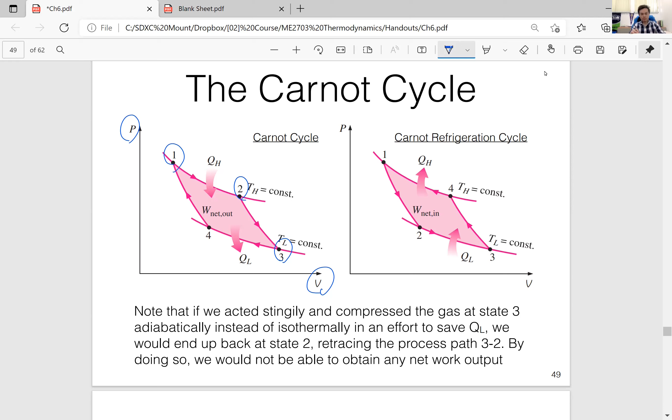During the expansion processes from 1 to 2, and then 2 to 3, these are expansion processes, and this is a PV diagram. So we know that the area underneath the process curves is the work. So 1 to 2, 2 to 3, this is work out, because this is expansion process, so this area is work out.

However, from state 3 to 4, then back to 1, this is compression process, so this is work input. This area represents the work input.

So their difference, the area composed by all these 4 processes, this area is the difference between the work input and work output. So this area is the net work out. You can see the 1 to 2, 2 to 3 work out is larger than work in, which is from 3 to 4 to 1. So this yellow area, or pink area by the textbook, represents the net work out.

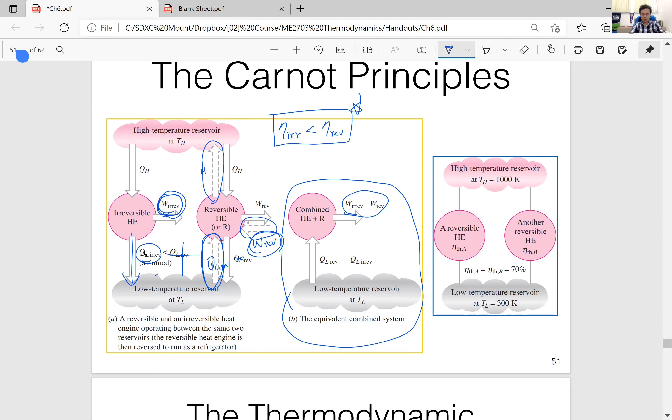Then Carnot's second principle tells us that the efficiencies of all reversible heat engines operating between the same two reservoirs are the same. We can prove this by a similar method. We assume they are not the same. Let's do this, easier: assume efficiency of reversible A is larger than reversible heat engine B. Then we can do exactly the same thing, by reversing one heat engine's process, then combining two heat engines into one. Then you should be able to prove this is wrong.

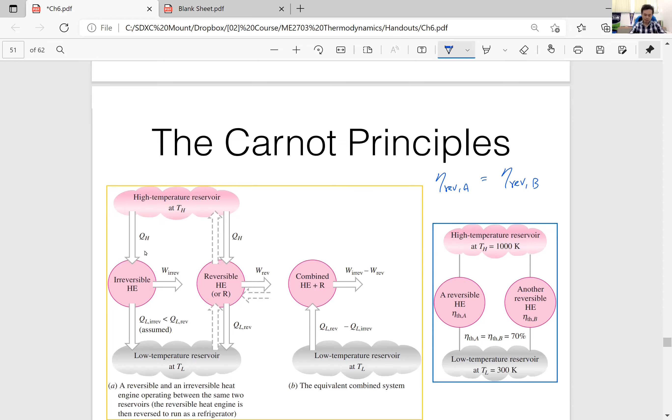So the correct one is, as long as they are reversible, their thermal efficiency should be the same, as long as they operate under the same two reservoirs. So these two Carnot principles, you need to keep this in mind as well. It's very important.

All right, so we have just finished the most important part of chapter 6, I believe. Now let's talk about temperature, but temperature scale, we mentioned, I believe we have mentioned this in chapter 1 when we talk about temperature. But here we can look at this, there are some different concepts here. A temperature scale that is independent of the properties of the substances that are used to measure temperature. Temperature scale, we know we have degree C, degree K, things like this, right?

But see this: the second Carnot principle tells us that the efficiencies of all reversible heat engines operating between the same two reservoirs are the same. We just proved this. So the efficiency of a reversible heat engine is independent of the working fluid, the way the cycle is executed, or the type of reversible engine used. So that means no matter what that reversible heat engine is, working fluid, process, everything...

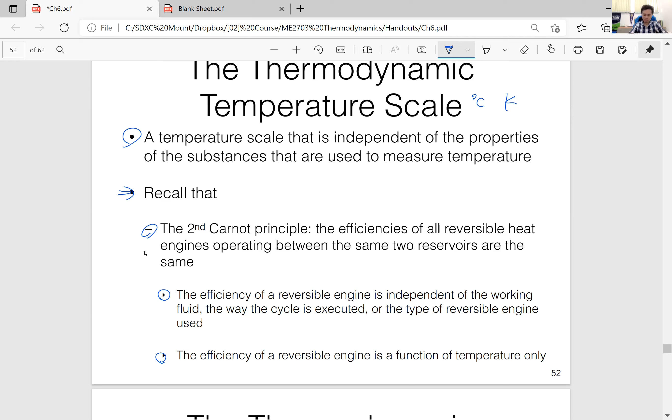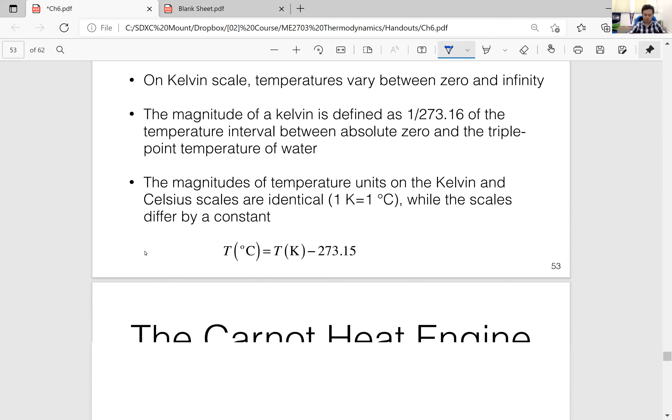As long as they operate between the same two reservoirs, their efficiency should be the same. The efficiency of a reversible engine is a function of temperature only. This is the implication of Carnot's second principle. It's not a function of the working fluid, it's not a function of the cycle, it's not a function of the process. So as long as it's reversible, the efficiency of a reversible engine is a function of temperature only. Keep this in mind, it's also important. So this is temperature scale, this is in chapter 1, I believe you already know that.

Whatever is reversible or irreversible, based on the definition of thermal efficiency, which is desired output over required input, we can always get the thermal efficiency is 1 minus QL over QH. But for any reversible heat engine, we just learned that the efficiency is a function of temperature only. So the efficiency of a reversible heat engine is 1 minus TL over TH. This is the so-called Carnot efficiency. They look similar, yes they do, so all you need to do is replace Q with T.

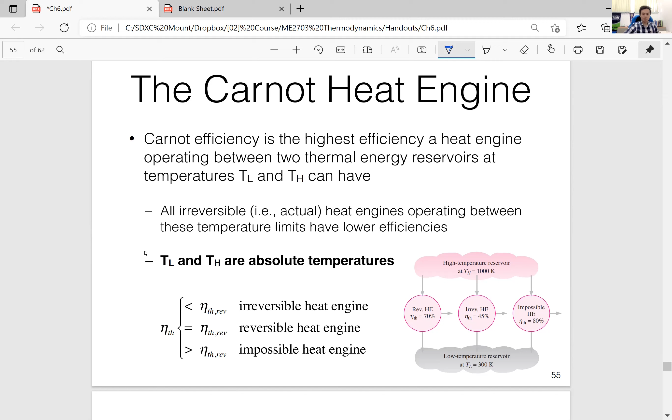So Carnot efficiency is the highest efficiency a heat engine operating between two thermal reservoirs at temperatures TH and TL can have. One more thing: if you want to use the temperature to get the thermal efficiency, first you need to make sure the process, the entire device, is reversible. Second, don't forget the unit. If you use degree C or K to calculate the efficiency using this relation, the result would be very different. So don't forget, use absolute temperature if you don't know what kind of unit you need to use, because this is one thing divided by another, so using different temperature units would give different values.

Carnot efficiency is the highest efficiency a heat engine operating between two thermal reservoirs at temperature TH and TL can have. So all irreversible heat engines, all actual heat engines, are irreversible, and all real engines operating between these temperature limits have lower efficiencies, because all actual heat engines are not reversible, and efficiency of actual heat engines should be smaller than the efficiency of a Carnot heat engine. This is what the Carnot principle tells us. So again, when calculating the Carnot efficiency, the temperature unit you need to use is absolute temperature.

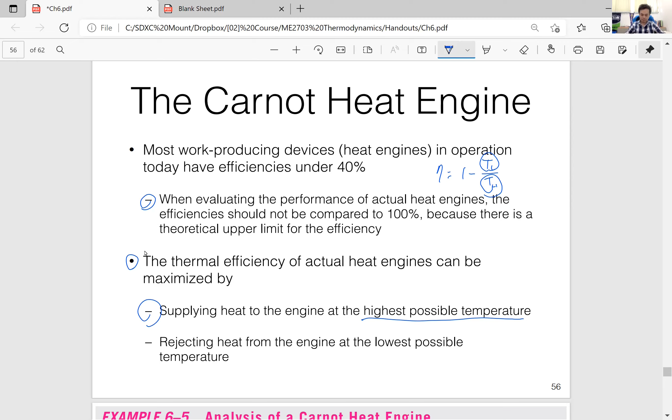Let's try a few examples, very easy. A Carnot heat engine, as shown, receives 500 kJ heat per cycle from a high temperature source at 652 degrees, and rejects heat to a low temperature reservoir at 30 degrees. Determine the thermal efficiency of this Carnot engine and the amount of heat rejected to the sink per cycle.

The thermal efficiency is 1 minus QL over QH, no matter if your device is reversible or irreversible. But if your device is reversible, which is a Carnot engine, then your thermal efficiency -- you can replace Q with T. If this is reversible, meaning this is a Carnot engine, the efficiency is 1 minus TL over TH, because TL and TH are given.

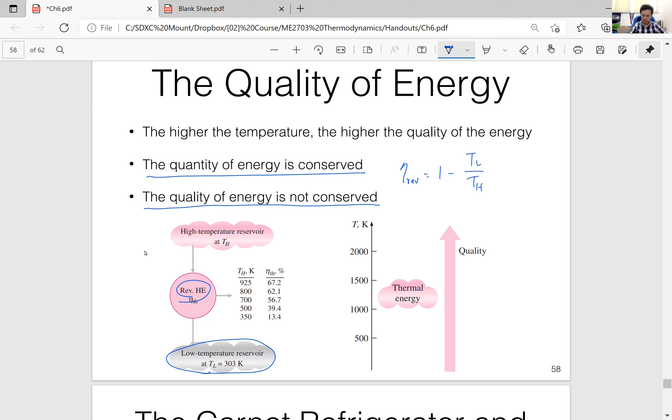For a reversible heat engine, we know the thermal efficiency is 1 minus TL over TH. If TL remains constant at 303 K, then if you increase TH, the efficiency is higher. So that means higher temperature has higher thermal efficiency. Then we say that the quality of a higher temperature source is higher. Our thermal energy has a higher quality at a higher temperature. So the higher the temperature, the higher the quality.

I think this statement is based on thermal efficiency, because we like to maximize thermal efficiency. We know that the thermal efficiency of an ideal heat engine, which is a reversible heat engine, a Carnot engine, depends on temperature only. As long as the temperature is higher, this reversible heat engine's thermal efficiency is higher. So this is why we say thermal energy has a higher quality at higher temperature.

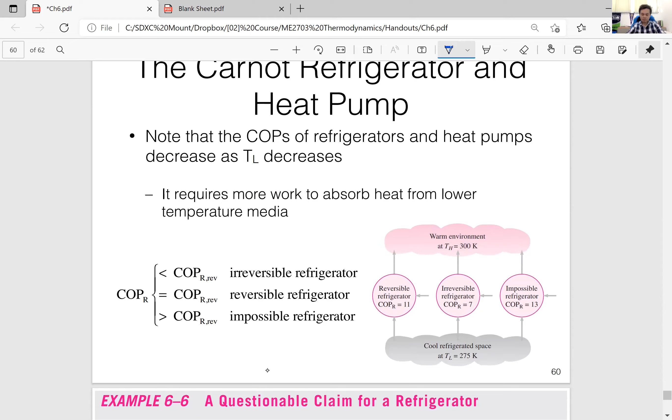So the highest COP that a refrigerator or heat pump operating between the temperature limits can have - this is the COP. The maximum or best COP of a refrigerator or heat pump operating between the same two temperature reservoirs is the highest, as long as your device is reversible. So the conclusion is: as long as your process, your device, is reversible, then your device is the best.

I'm saying just best. Best means if your device is used to deliver work, then your device delivers the most work. If your device consumes power, and your device is reversible, then your device consumes the least power. So least or best depends on the purpose of the device. Just like the definition of efficiency.

It's always desired output over the required input, right? For refrigerator and heat pump, they are the same device, but as long as the purpose is different, then their COP is different, or their performance is different. It's still desired output over required input.

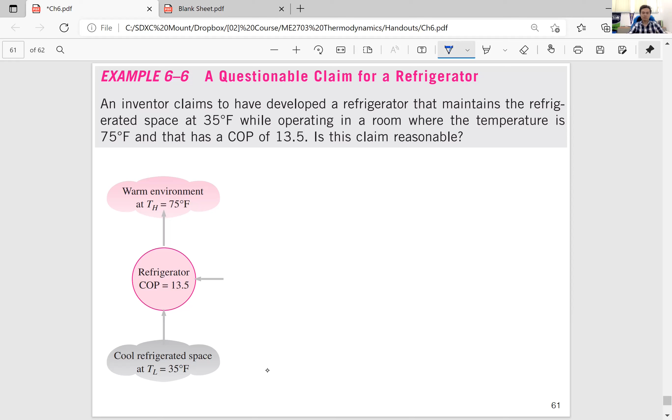Look at this COP of a refrigerator. An inventor claims to have developed a refrigerator that maintains the refrigerated space at 35 degrees F while operating in a room at 75 degrees F, with a COP of 13.5. Is this claim reasonable? So we want to check if this claim is reasonable. All we need to do is assume this refrigerator is reversible.

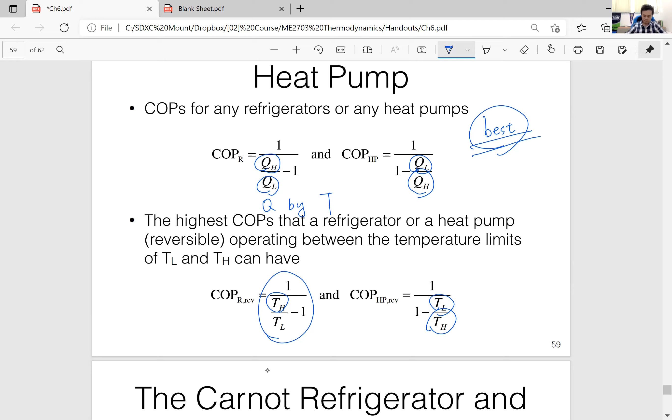So this COP of the reversible refrigerator should be COPR equals 1 over (TH over TL minus 1), this is 1. So let's get this: TH is 75. This is British units, so we need to convert to absolute British units, so plus 460. Then over 35 plus 460, minus 1. Up here, this is 1. So by doing this, we are examining what the maximum COP this refrigerator can have is. It's a number, right? So let me do the math.

So this is the maximum COP this device can have, if this device is reversible. So this guy claims the actual COP is 13.5, which is higher than the reversible COP. So this is... sorry, this is not true. So this claim is false.

Last one: a heat pump is used to heat a house during the winter. The house is maintained at 21 degrees. The house is estimated to be losing heat at the rate given. When the outside temperature drops to -5, determine the minimum power required to drive this heat pump.

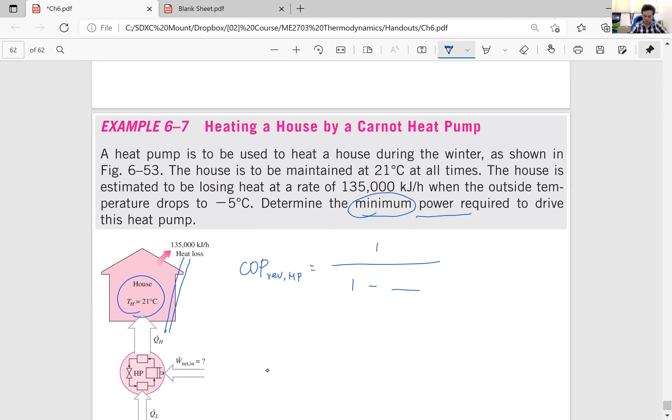So COP of the reversible heat pump, this is 1 over (1 minus TL over TH). This is the best situation this heat pump can work in, because we assume this heat pump is reversible. So this is 1 over (1 minus TL), TL is -5. So -5 plus 273, over 21 plus 273.